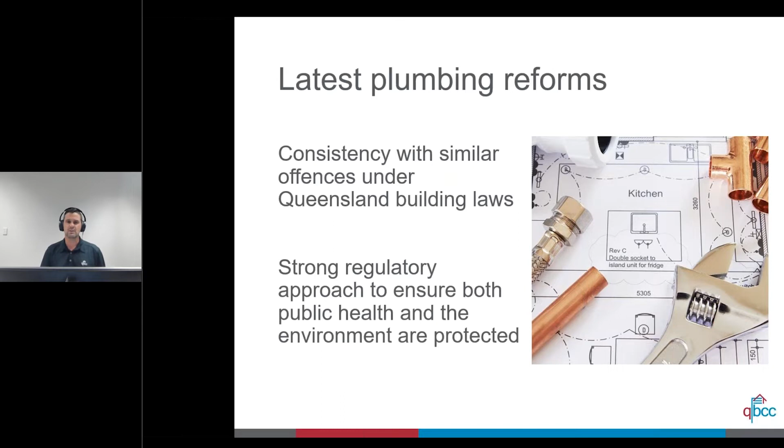So I will briefly mention the QBCC's function in relation to plumbing and drainage work and provide an example of the regulatory approach in tackling non-compliance by licensees. Hopefully you'll see some of the benefits in having interagency collaboration, in particular with regards to reporting non-compliance.

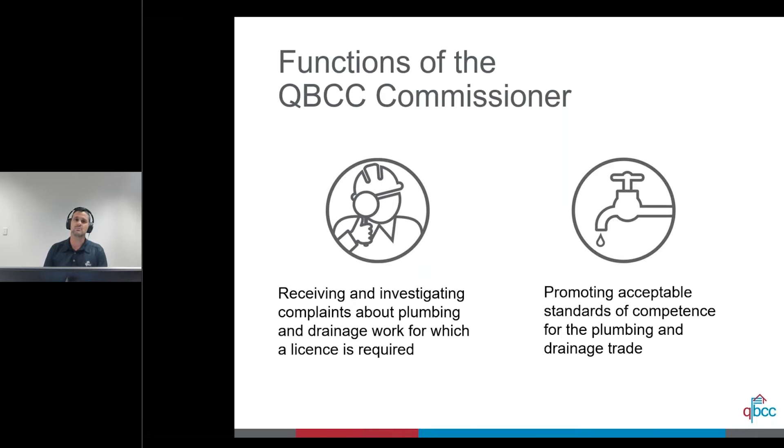So in terms of the functions of the QBCC Commissioner, the Act establishes the function of the Commissioner, and this includes, but it's not just limited to, a couple of examples up there on your screen. One of those is receiving and investigating complaints about plumbing and drainage work for which a licence is required, and also part of the Commissioner's function is to promote acceptable standards of competence for the plumbing and drainage trade. Now, education is one of those tools that the QBCC uses in actually promoting acceptable standards of competence.

The QBCC is actually currently working on educational videos, which will be available to the plumbing and drainage industry at large. There is a particular focus at the moment on the installation of hot water heaters, but we also do recognise that there are other issues of non-compliance that exist in the trade, and an example that comes to mind is the installation of overflow relief gullies. So we do intend on publishing more videos, both in the short and also the longer term.

Another tool at hand for the QBCC is obviously the exercise of enforcement powers, such as prosecution, issuing infringement notices, or taking disciplinary action. So with regards to handling, infringement notices themselves are relatively quick and typically an efficient way of dealing with minor offences. Circumstances where disciplinary action would be more appropriate might include where we have repeat or deliberate offences or behaviour by licensees that has caused serious detriment to consumers.

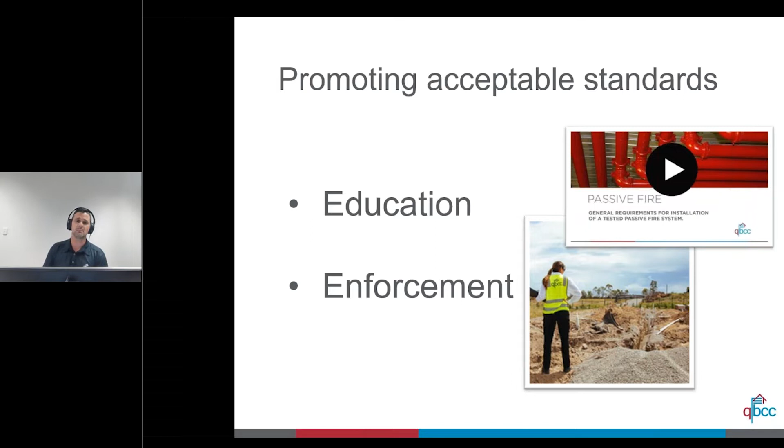The QBCC will generally deal with complaints and investigate matters on their own individual merits, having regard to the evidence in its totality. So disciplinary action should be directed primarily to the protection of the public rather than the punishment of errant licensees. So whilst the consequence of taking disciplinary action may operate as a form of punishment, the action is not punitive, but rather protective in nature. So therein lies the desirability of maintaining and enforcing standards of the plumbing and drainage trade, and it also promotes public confidence in the same.

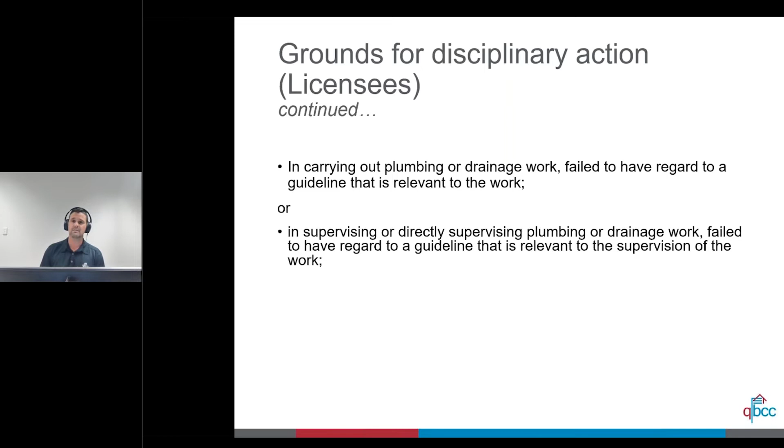There's also other grounds, including, for example, where a licensee, in carrying out the plumbing and drainage work, has failed to have regard to a guideline that is relevant for that work. An example here might be where we have a guideline published by the department for the installation of temperature control devices. There's another one there in terms of the licensee supervising or directly supervising plumbing and drainage work, and they failed to have regard to a guideline that is relevant to the supervision of that work.

And the last two there, you can see where licensees contravene a provision of the Act, and I'll talk about that a little bit more in a little bit, but you can also see that there are grounds there when a licensee has actually been convicted of an offence against the Act. And it says the repealed Act, which means the 2002 version of the Plumbing and Drainage Act. And it also relates to offences in relation to the Queensland Building and Construction Commission Act.

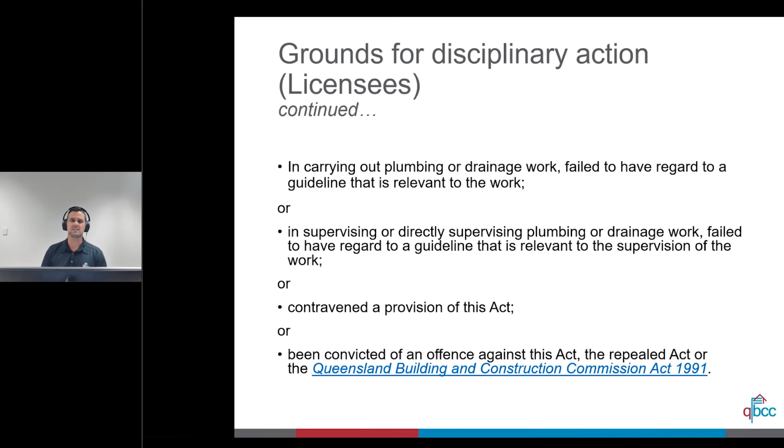So the regulatory approach that we have is based on incidences that happened in the past, and largely it relies on consumer complaints. This is not necessarily to say that the process is less effective than a proactive strategy of compliance, but the point I'm trying to make is that QBCC requires knowledge of these incidences in order to effect any change in the standards of work that is carried out by licensees.

So I just wanted to go through a bit of a case study, and this is in relation to disciplinary action that the Commission took against a particular licensee. The decision itself was to issue conditions on a licensee's license. I'll go through some of the history behind our investigation and the reasons why we took disciplinary action and why we took that particular disciplinary action in terms of issuing a condition on that person's license.

So in this particular case, the QBCC received multiple complaints from multiple sources about defective work by a particular plumber and drainer, and this involved 2 separate properties. Throughout that investigation, we did identify that there was an additional property, and for that property it was alleged that there was further defective work. So in these cases, we identified that the work itself was notifiable work, and that person was either supervising the plumbing work or personally carrying out that work.

Some of the issues that we found throughout the investigation related to hot water heater installations, but also involved renovation work as well. So I'll just list off a couple of things that we found during that investigation, which was the safe tray for the hot water heater was holding water and not draining. We found that there was an isolation valve that wasn't accessible from the floor or finished surface level. There was inadequate insulation on the external pipework for the hot water heater installation.

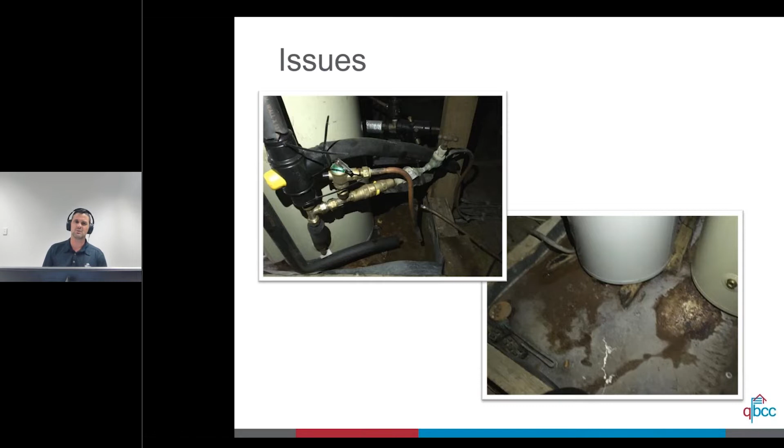So also, in addition to the defective work, we found that the plumber and drainer had been previously issued with an infringement notice for alleged defective work. We found that person actually hadn't paid the fines. So in this case, monetary penalties were not really going to serve as an appropriate means of deterring any future offending. So, like I said before, the decision was to take disciplinary action and to issue conditions on their license.

The condition was to either have the work inspected by local council through the permit process, or alternatively, the work had to be supervised by another licensee. So the requirement would be for that plumber to actually engage another licensee to supervise that work. So the reasons why the action was taken was to minimise any harm to the public, whilst also reducing any financial distress to the plumber and drainer as a result of employing another person to supervise the work, or any of the costs associated with the permit as well.

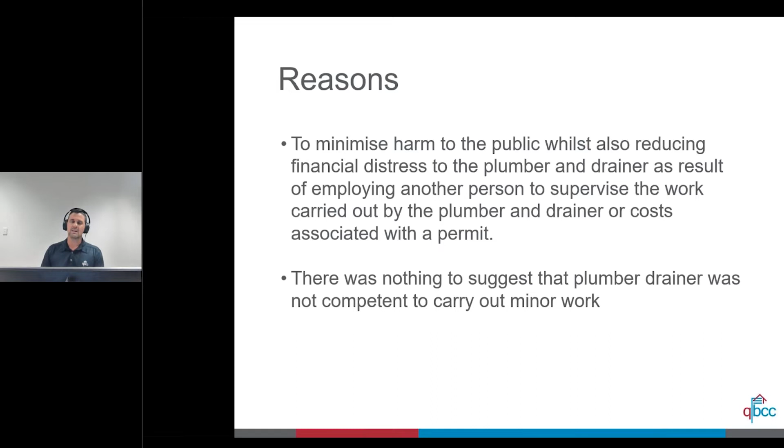In this particular case, there was nothing to suggest that the plumber and drainer was actually not competent to carry out minor work. And so for the notifiable work, if it was to be inspected by local government under a permit, this would ensure that the work is being overseen and that any non-compliant work would be remedied by way of an action notice. The second part was that where it was supervised by another licensee, this would also ensure that the work was being overseen, and that the supervising licensee would bear some responsibility for that work being carried out.

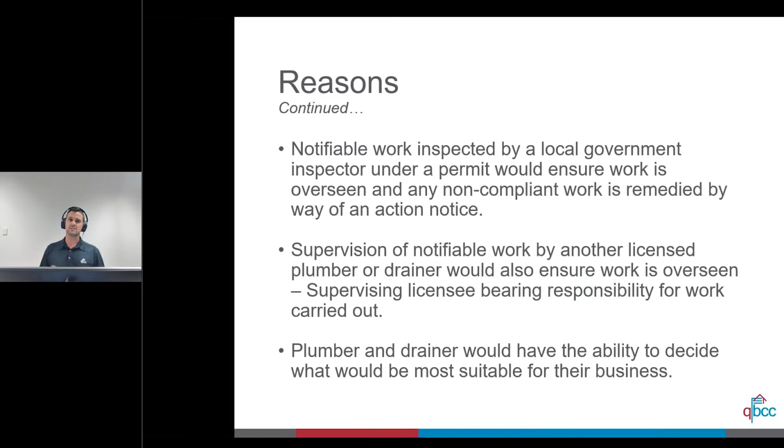So having those two options conditioned upon that person's license gives that person the ability to decide which would be most suitable for their business. But it obviously ensures that the work is going to be overseen either by local government or by a supervising licensee. So it maintains integrity, I guess, of the system or the work that's being carried out.

So in terms of interagency referral, the QBCC appreciates the important role that local government plumbing inspectors have in monitoring and enforcing compliance with the Act, the assessment and inspection of plumbing and drainage work obviously being a core function of that role. This makes you a pretty valuable partner in terms of regulating the carrying out of plumbing and drainage work in Queensland.

And local governments obviously have their own way of dealing with and managing non-compliant plumbing and drainage work. And generally speaking, they're confined to just issuing notices for the work to be rectified. And this could be by way of an action notice or by way of an enforcement notice.

So this may result in the work being rectified, but there is no additional consequence with this. We know, however, that there are licensees out there who continually carry out work in a way that doesn't comply with the code. So in order to improve the standards of work performed by licensees, it's necessary for QBCC to investigate these occurrences, and if relevant, take disciplinary action against them. This in turn is likely to support the local governments insofar as increasing the likelihood of any future work carried out by the licensee complying with the code requirements.

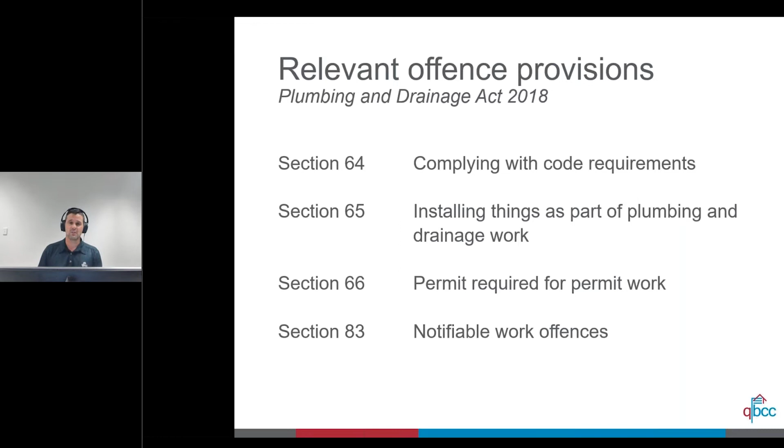So I've just explained some of the regulatory approach that we have, working with local governments to know about errant licensees that are out there. We want to receive information from local governments about these errant licensees so we can look at whether there are grounds for disciplinary action, and if so, take the necessary enforcement action against them to improve the standards of work being carried out by our licensees.

Well, welcome everyone. Today I'll be talking about non-conforming building products: what is a building product and what is a non-conforming building product. I'll try and relate this to plumbing products and the Watermark certification so that it's relevant for you as plumbing inspectors. Whilst today is about plumbing, the non-conforming building product information is applicable to all building products. I'll briefly explain some definitions and give you some examples to assist with the NCBP overview.

I'll talk about duties relating to NCBP, and I'll give you some information on how you can provide details to us if you suspect that you've got an NCBP, or pass information on to plumbers so they can tell us about something they've seen on site or on plans. So I'll move into the definitions. Our Act defines these for us, and the important one at the top of the screen is a building product, which is any material or other thing that is associated with or could be associated with a building.

Noting the underlined parts on the screen there, they are defined terms within our QBCC Act. So a building product is a non-conforming building product for an intended use if, when it's associated with a building, it is not safe, it does not comply with the relevant regulatory provisions, or the product does not perform or is not capable of performing to a standard which is represented by a person in the chain of responsibility.

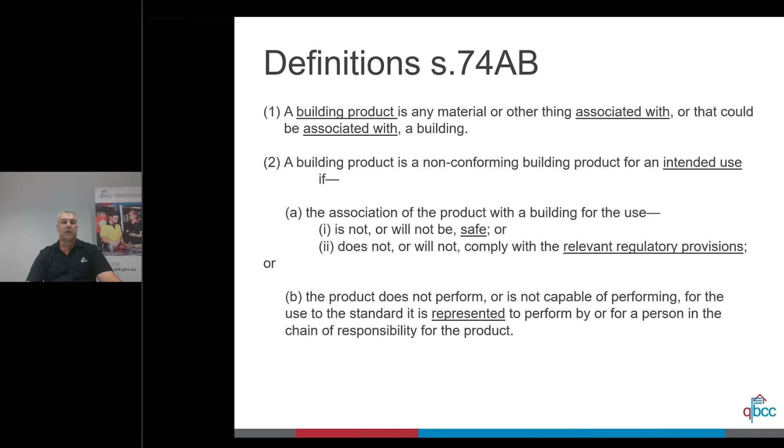Okay, three things I want you to remember for today for an intended use: safe, compliance, and representation. Remember those three things. So I'll move on and just talk about safe. So you'll notice in the definition there, it's got the term so far as reasonably practicable. This is a defined term in our Act under Section 74AA, and this is where the QBCC Act differs from the Building Act or the Plumbing and Drainage Act, in that it's not solely reliant on non-compliance with those acts to determine that a product is an NCBP. A product can be compliant with those relevant regulatory provisions, but it can also be considered unsafe and therefore a non-conforming building product.

So trying to use an example, reasonably practicable: stairs are provided for circulation, and all risks of injury to a person can't be removed. As we all know, walking up and down stairs is not a risk-free proposition. However, stairs that are constructed to the NCC requirements minimise the risk of injury to persons so far as is reasonably practicable, but it doesn't eliminate it. So every two-storey house hasn't got a lift. That's because it's not reasonably practical to install one in every home over one storey.

So quickly on compliance. So products need to comply with the relevant regulatory provisions. As we said, those being the Building Act or the Plumbing and Drainage Act. And these acts, as we know, refer to compliance with the NCC, being the BCA, for you guys, the Plumbing Code of Australia. The QDC applies to both building and plumbing products and other reference standards. So in relation to plumbing products, Part A5.3 of the NCC gives us various methods to demonstrate evidence of suitability to support the use of a material or product.

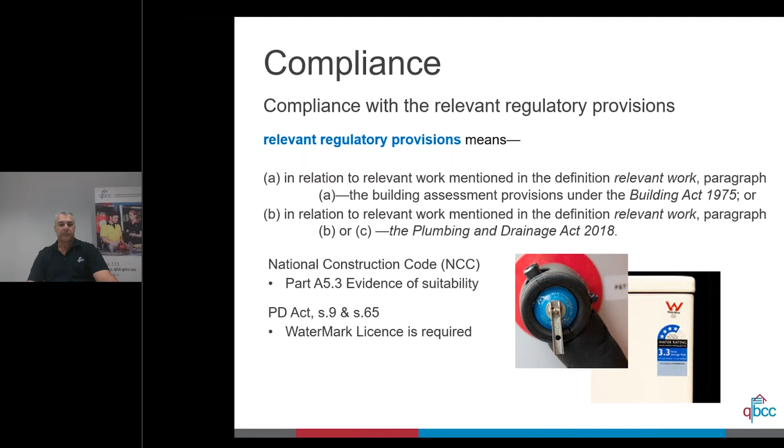So it's either got to be mentioned on the schedule of products or in the schedule of excluded products. Moving on to representation. So this is where someone's claiming that a product will do something or will comply with the standard when it doesn't. This can include representing that a product complies with the standard, even if that standard isn't listed in the relevant regulatory provisions. A couple of simple examples.

You could have taps that are sold on an online platform with no WaterMark, but they're advertised as meeting Australian standards. You could have some kitchen cupboards advertised as meeting 4386, or a lift that someone's putting in a single detached house, and advertising it as meeting the lift code AS 1735. These last two examples are both standards that are not referenced in the NCC.

However, if a person in the chain of responsibility claims compliance with a standard or part of that standard, then it must comply with all aspects of the standard they're claiming compliance with or the part they're claiming. Noting that compliance with the NCC or a specified standard can depend on whether it's a reference standard, i.e. it's listed in the back in Schedule 4, in which case for us it would form part of the relevant regulatory provisions and be a compliance matter, not a representation matter.

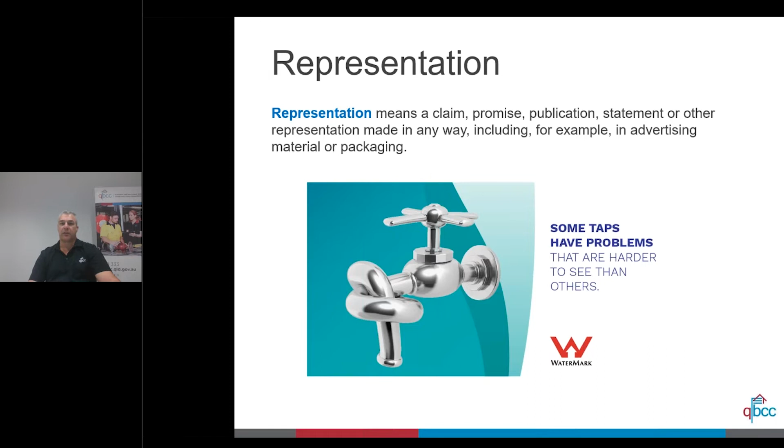So I spoke about chain of responsibility. So who is in the chain of responsibility? That is a person or a company who designs, manufactures, imports, or supplies the building product. It also includes the person who installs the product, and it includes an architect or an engineer who can be in the chain of responsibility if they specify that a product be incorporated into or connected into a building, i.e. it's in their spec or on their plans that they've given for the building. And the person or company can be responsible for more than one part in the chain of responsibility for a building product.

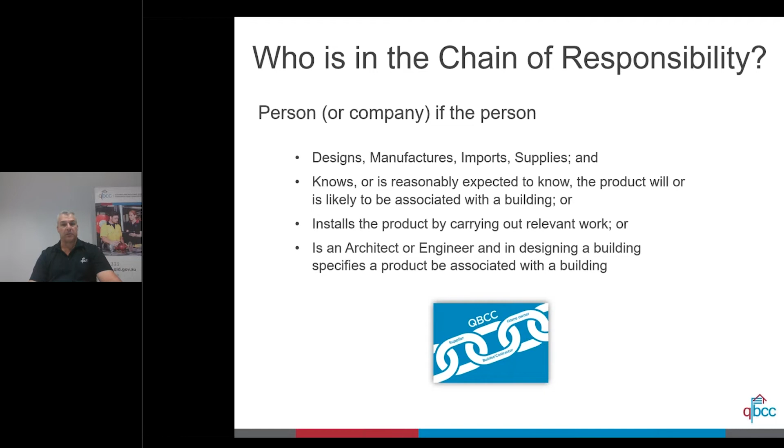So who's the installer? This can include several parties, the obvious one being the person physically undertaking the work, the builder or the plumber replacing the kitchen taps or the hot water system. But it also includes the supervisor, the foreperson, the project manager, and the licensed nominee. Potentially, it can also include someone who is engaging a person to do the installing. And this could be a contract administrator, project manager, superintendent, or a contractor who engages the subbies or tradespeople to install the product. Could be a principal contractor, could be an owner, possibly even a developer.

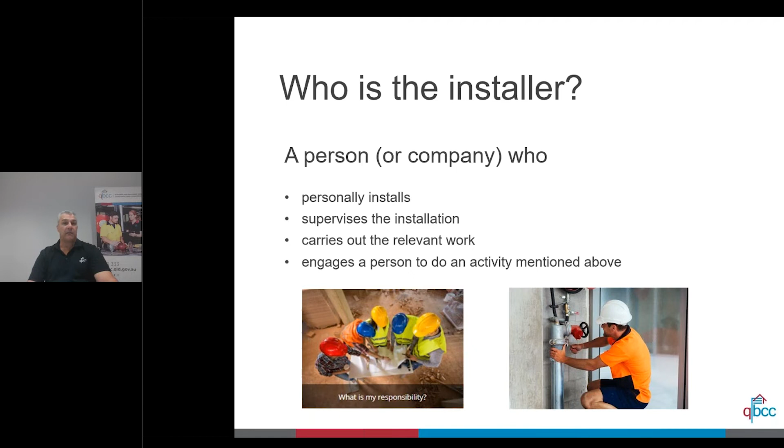So how do we check for compliance? One of them is doing laboratory testing. So if you're checking for the authenticity of certificates that are provided for your evidence of suitability, it could be from either a local lab or it could be from overseas. If it's an overseas one, you need to look for the International Laboratory Accreditation Cooperation, or ILAC for short, Mutual Recognition Arrangement signatory. And you can check this on the ILAC website.

A couple of examples that you may have seen for different products would be the China National Accreditation Service or the International Accreditation New Zealand system. The common one that we all will be aware of will be the National Association of Testing Authorities, or NATA, and either the ILAC or the NATA are accredited testing laboratories.

However, if you're getting a certificate from the testing laboratory, remember to check the scope. They might be testing something like we see for building products all of the time, where they're doing things for fire rating. However, on the NATA website, there are only 5 places that are accredited to do AS 1530 Part 4. So you need to make sure you're checking the scope to make sure it's within them if you're using that as a testing certificate for your evidence.

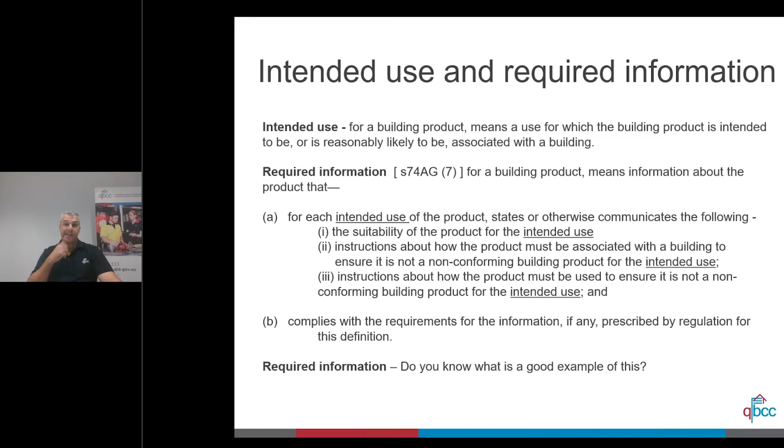Okay, I said I'd talk briefly about duties. So for non-conforming building products, there is a primary duty for all persons in the chain of responsibility, and that is to ensure as far as reasonably practicable that a product is not a non-conforming building product. This is a positive duty. That is, everybody in the chain of responsibility must do this.

Remembering that reasonably practicable is a defined term within our Act, and everybody in the chain of responsibility must give to the next person in the chain all relevant information when they give or supply a product so that it can be used and installed to avoid it being an NCBP. An installer's got to give the building owner all the information when the product's prescribed by regulation. The example that I can think of for this is a fire pump for the maintenance requirements to meet the building fire safety regulation.

So I'm just going to the second part. I'll briefly talk about defective notifiable work, and then we'll go straight into our fire audits and just give you some general information about our auditing process and some of the results that we see from that.

But as I'm sure you're all well aware of, the plumbing and drainage legislation in Queensland establishes jurisdictional authority for local governments in the assessment and inspection of plumbing and drainage work. What this means is that local government plumbing inspectors have an essential role in ensuring compliance with the relevant regulation and codes for the trade. And this extends both to permit work and notifiable work.

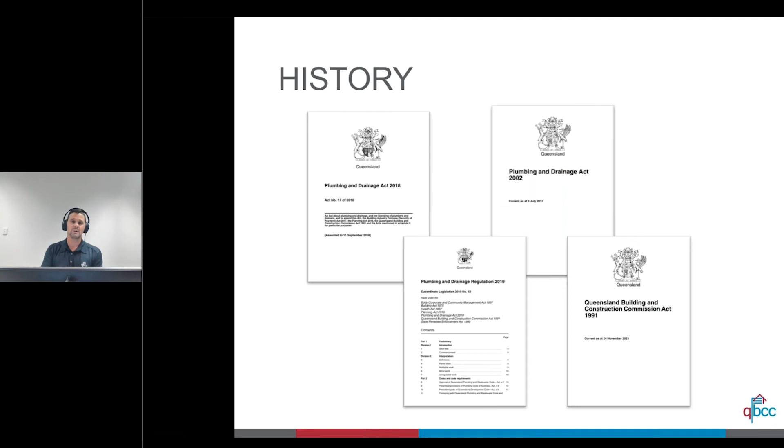As again, I'm sure you're all well aware of, the introduction of notifiable work happened back in November 2012, and that's close to 10 years ago, and how quickly time flies. So this meant that plumbers and drainers had a greater scope of work in which they could do the work without first needing a permit, and then obviously having to request local governments to inspect that work.

The potential consequence of this, however, was in the failure of plumbers and drainers to adhere to code requirements, particularly when they were to consider the risks that their work wouldn't be audited by the local government. That's because obviously there's no statutory mandate to carry out these audits. So auditing notifiable work ensures that the public health and safety is protected, and that the public confidence in the regulatory system is maintained.

The QBCC is able to monitor compliance, particularly when we're provided information from local governments about the audits that were undertaken. And we're assisted by this through the arrangements that we have with the work performance agreements. So to give you an idea of the compliance for notifiable work audits, we have put together some figures which we thought you'd be interested in knowing.

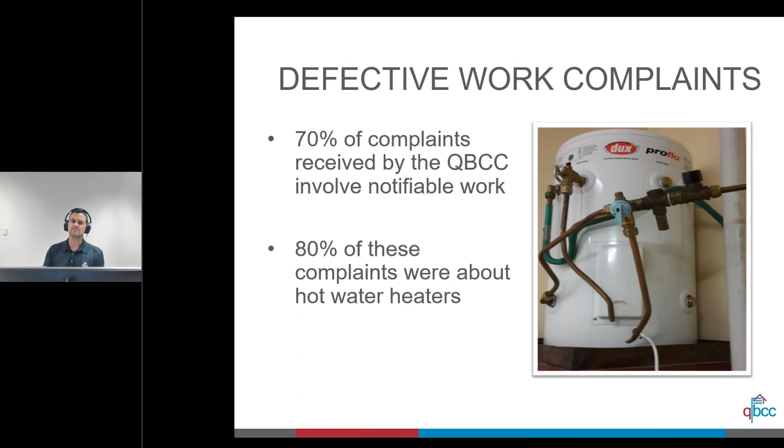So when our educational videos are completed, they will be available on our YouTube channel, but they'll also be available on our website as well. So watch this space.

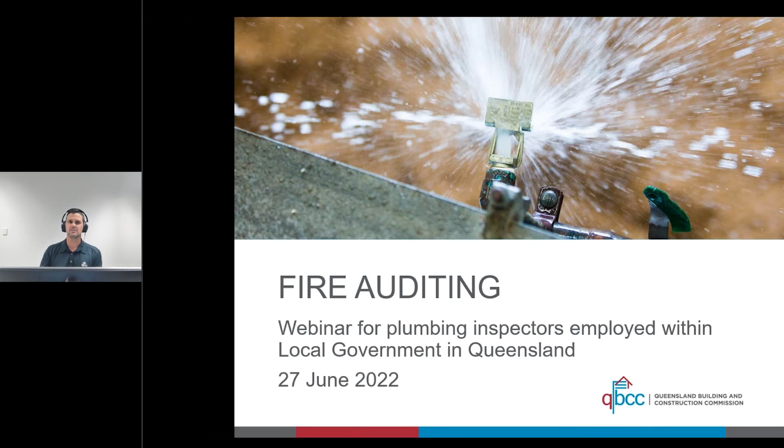I'll quickly move into fire auditing. Our auditing includes auditing the licensing component of fire protection systems, and it's an important piece of work that we do, and it's paramount to our compliance activities. We work that into our operational plan throughout the year.

Our audits target established reticulated water-based fire protection systems, and are there to detect any unlicensed fire protection work. Our focus is particularly on those who undertake the maintenance of these systems, but it also involves those who test and inspect the systems as well. By doing this, it ensures that only persons with an appropriate license undertake this work, and this is important in terms of safeguarding the community.

The current fire protection licensing framework is actually one of the most comprehensive in Australia. It involves a range of classes that relate to fire protection work, specifically designed to accommodate the niche industry that it is. A recent review of the fire protection license simplified the license classes to better reflect changing industry practice, to recognise the more broadly available technical qualifications for this work, and to facilitate improvement to standards across that particular industry.

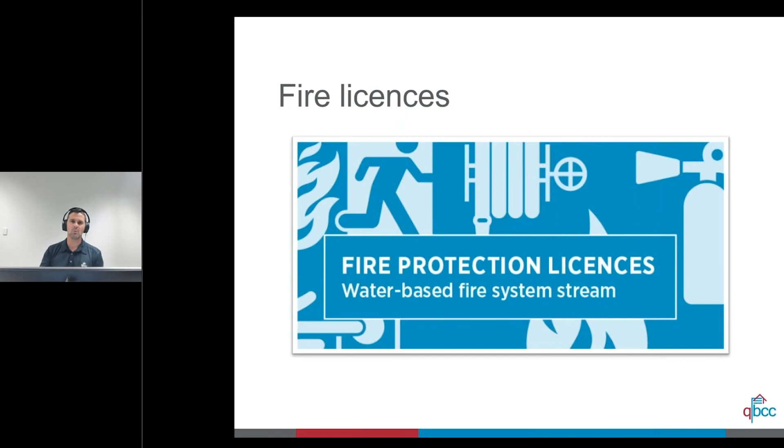There's a new streamlined fire protection licensing framework, and that became effective from 1 May 2021. As you can see on the screen, it sets out the new framework: we have 5 license streams, being passive, special hazard fire systems, water-based fire systems, portable and electrical. Beyond that, we've got license classes including design, certify, install, maintain, and inspect and test. And further, we have 3 license classes, being contractors, nominee supervisors, and fire protection occupational license.

Some licensees who have automatically transitioned to the new framework will be required over the coming years to upskill and complete additional qualifications and/or units of competency. There are specific timeframes by which this upskilling must be completed and notified to the QBCC. In these circumstances, licensees will receive notification from us confirming these requirements and timeframes.

As part of the legislation change, key definitions have been updated to provide clarification on the scope of work across these classes. This has a direct impact on the type of work that can be completed under each class: as I mentioned before, design, certify, install, maintain, and inspect and test. The biggest change comes to the certify class, whereby under the new framework, the certify class are no longer able to complete inspect and test.

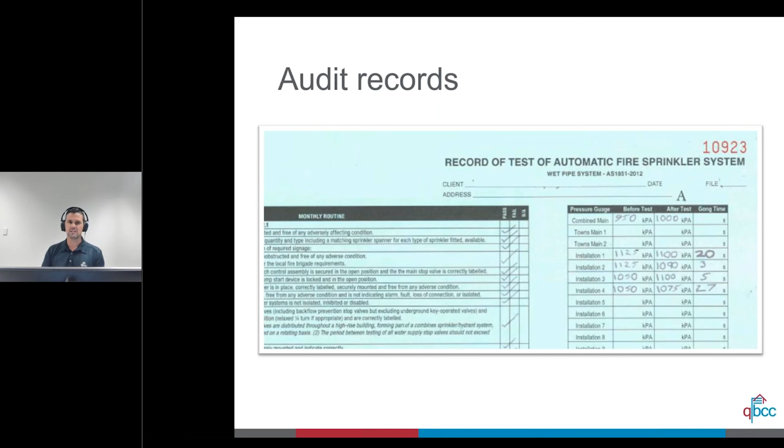So with the audits that we've conducted for this financial year to date, we've actually found that there's a very high compliance rate in relation to those who we've identified as carrying out that fire protection work. So as we continue under the new licensing framework, we're hoping to see equally pleasing results. Well, obviously we'll know in future how that goes.

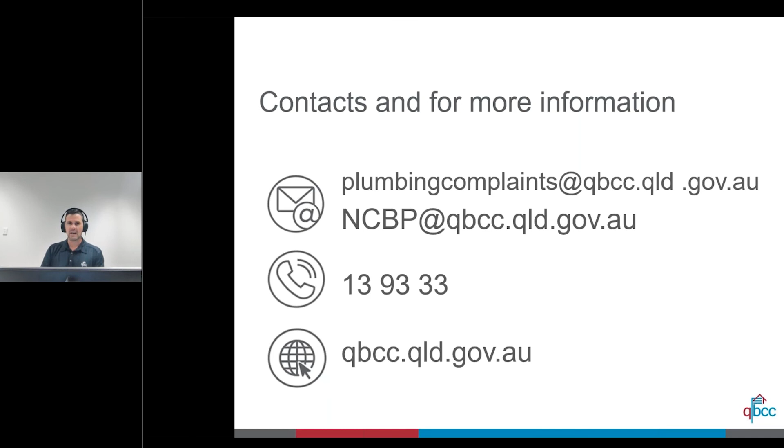Great, thank you so much, Grant. And I think now we're into the Q&A segment of the presentation. So that brings us to the end. Grant and Zane, shall we get into the Q&A? Let's go. Perfect, okay. I'll just wait for Grant. Sorry, I was just grabbing a drink of water. No problem, thank you, sir. Okay, well, let's get into it. And in fact, the first question is probably for you, Grant, so we'll start with you.

So we've got the question: you mentioned that you intend on publishing videos, and you mentioned hot water heater installations and overflow relief gullies. What other topics do you plan to publish videos on? Yeah, it's a really good question. So based on what we see and what we hear from people such as local government plumbing inspectors, we believe that more education is required around the requirements for notifiable work. For example, when notifiable work is finished.

There's also what we hear about, a lack of knowledge around home warranty insurance and contracts, and some of the other obligations that people have under the legislation. We believe that plumbing and drainage contractors lack some knowledge in that space. So we're probably more likely to focus our attention towards these areas as well.